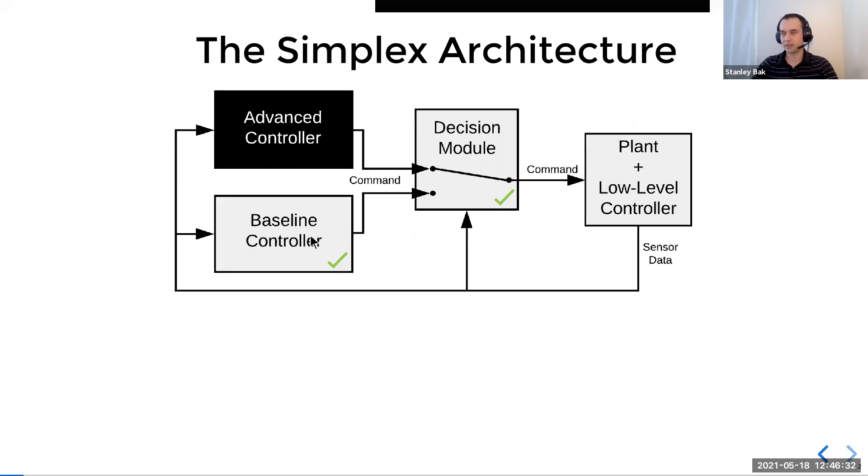But in order to add some safety to the system, you also have this backup controller, which you call a baseline controller. And the decision module monitors the state of the plant, and then it switches to the baseline controller if at some future state it's possible you get close to violating safety. And so this is the original Simplex architecture, but there are some downsides to this type of setup. The one we'll focus on today is the baseline controller itself.

There are formalisms in the paper. I won't go into too many of them in the talk, but we assume a discrete time model where, given the state, an input from one of the controllers, and potentially a disturbance, if we're considering disturbances, you have some nonlinear function that computes the next state of the system, and it proceeds in this fashion.

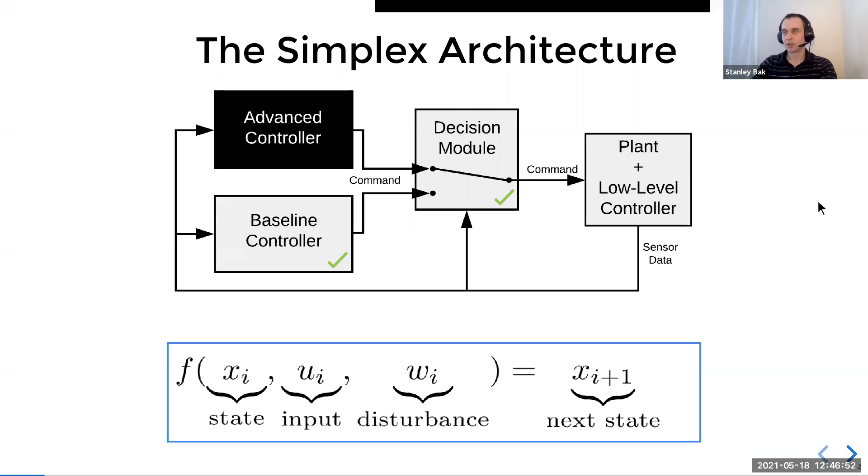So what's stopping the Simplex architecture from being more widely used? One drawback is the baseline controller must be provably safe. You need it as a backup. So if it's unsafe, your whole system will violate safety. So this means you can't typically use things like model predictive control, where you have complex cost functions or nonlinear differential equations, because this relies on solving global nonlinear optimization problems online.

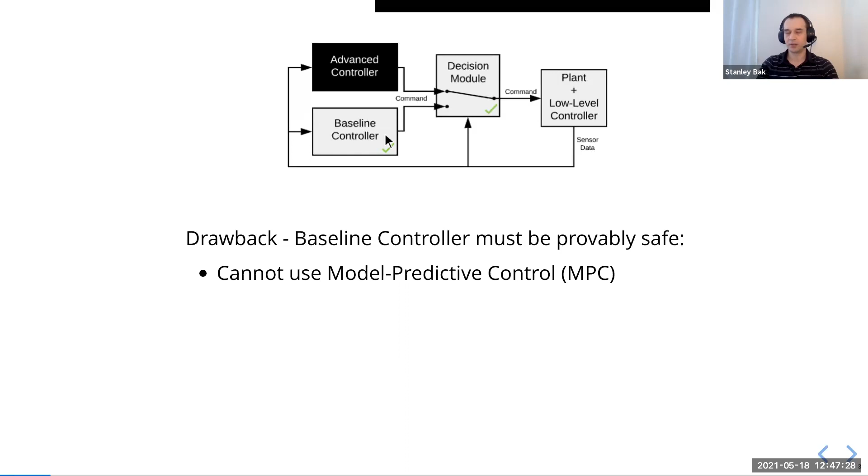And typically you have some trade-offs between exploration and exploitation, and there's some randomness involved in how those are solved. So you can't guarantee that you'll always find an optimal or even a good solution. You can't use things like rapidly exploring random trees, because again, that relies on some randomness. So you can't statically verify algorithms that use RRT, so those couldn't be used as baseline controllers.

You couldn't usually use things like neural networks. I'm interested in verification of neural networks, and certainly there's been progress in the field, but I'd say for sufficiently complex networks, you really couldn't verify that the closed loop system is safe using current technologies.

You couldn't use controllers that are safe 99% of the time. So if you come up with a really good algorithm that works well, you still wouldn't want to use that as your backup controller if there's a chance that it'll fail. At least you couldn't guarantee safety in that particular case.

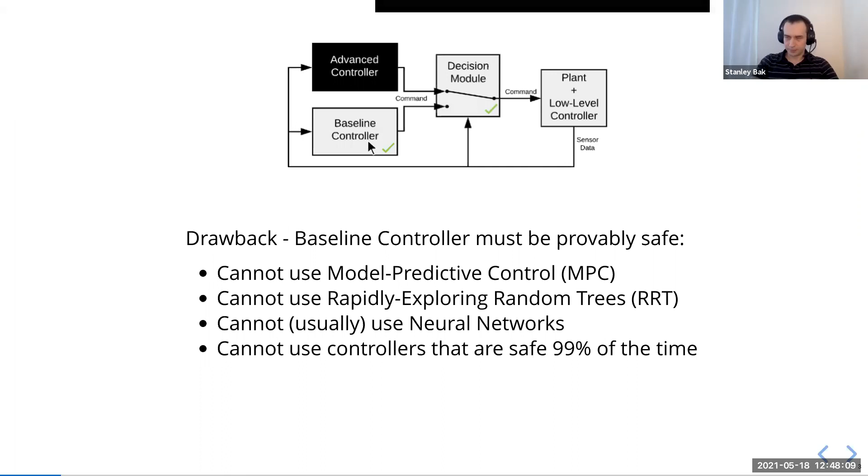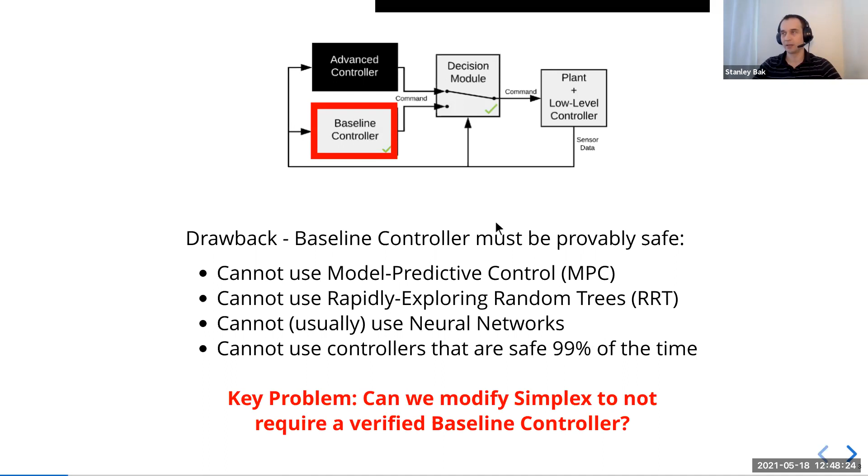So a key problem that we consider here is, could you modify the Simplex architecture to not have this requirement of a verified baseline controller? So to have a backup baseline controller, let's say it's safe 99% of the time, could I still use that in a way that guarantees safety 100% of the time? So before we get into the solution, what are some properties you would want for a system using Simplex?

The first one is you would want safety, which is that the system can't enter an unsafe state, 100% of the time. We want full correctness, assuming that the models are correct. Of course, even if you're developing a controller using control theory, you have this assumption that you have models of your system. So if the models are wrong, you can't make guarantees. So there's some assumption about models. But that's not enough.

In the original Simplex architecture, you can have safety by just always using the baseline controller. So what you really want is this other property as well, which we call transparency. This is saying that when things are going well, and it's defined in the paper more formally, but I'll explain the intuition a little later, the system looks like the advanced controller is actually the only controller in the system. So this prevents the case of just using the baseline controller forever and satisfying the properties we want.

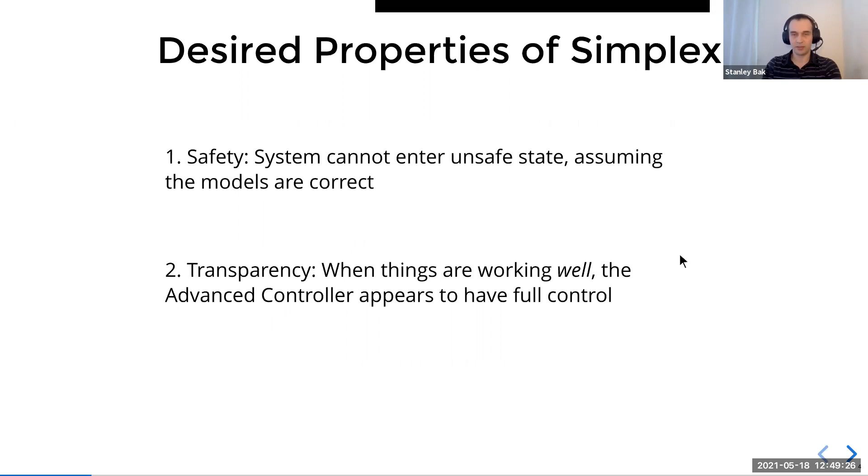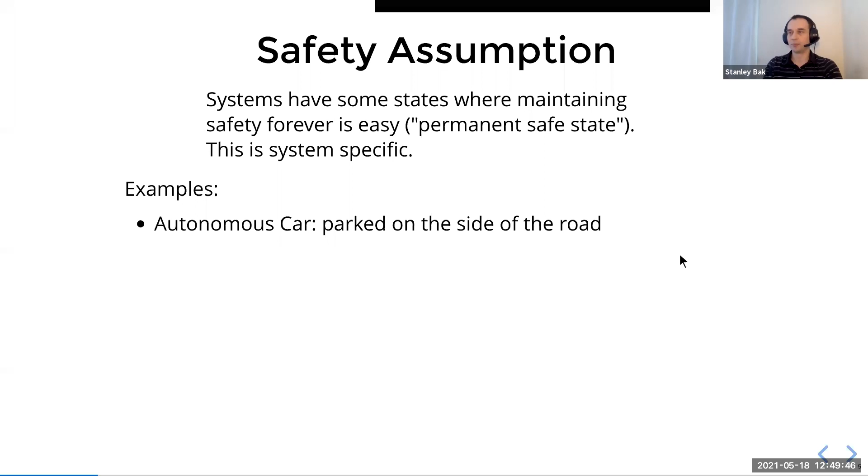So for this work, we make this additional safety assumption about systems, that there are some states where you can maintain safety forever and it's easy. We call these permanent safe states. And of course, this is very specific to a type of system, so it's easier to go through a couple examples. If you have an autonomous car, the moment that you're parked on the side of the road, that's a permanently safe state.

For a package delivery drone, maybe after it's executed its emergency landing and it's sort of on the ground resting, that's a permanently safe state. Maybe you have a fixed-wing aircraft swarm that's moving very quickly, and it's too fast for humans to be able to take corrective actions when problems occur. So then a safe state under that set of assumptions, you could just have the drones fly in non-intersecting circles, and this will slow down what's going on in the system so that a human can take control and issue corrective actions.

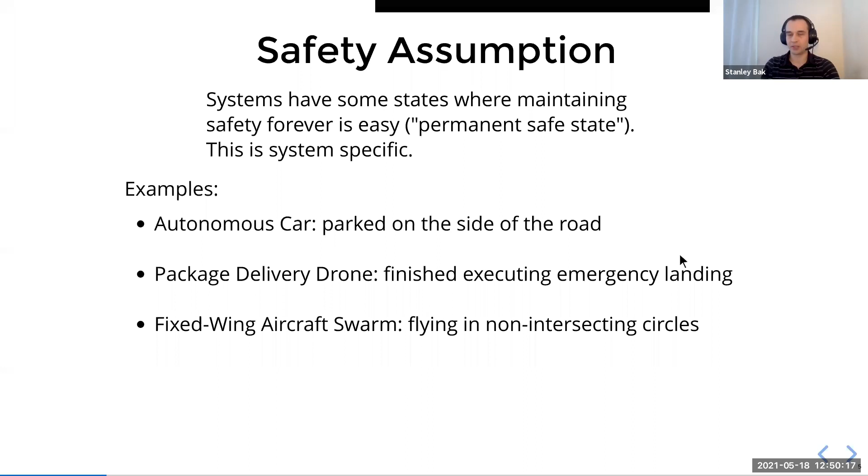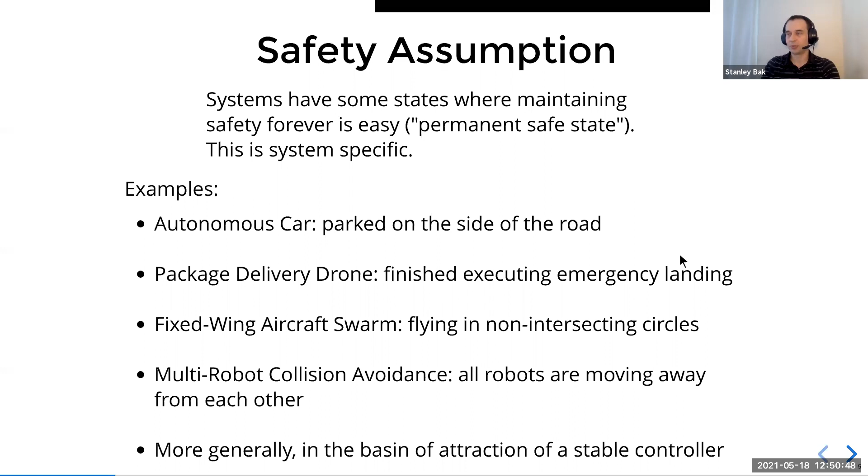If you have a multi-robot collision avoidance system, so this will be one of our case studies, we'll consider this to be safe if you have all robots that are moving away from each other, and then presumably if you keep the acceleration at 0, you won't have a collision into the infinite future. And more generally, if you're looking at control theory, if you have a nonlinear system and you're in the basin of attraction of a stable controller, and the states in the basin of attraction are safe, this could be a way to guarantee permanent safety into the future of the system.

So the intuition with black box simplex, how it works is that you have this system invariant that there's always a backup plan that can get you to one of these permanently safe states. So the way the system works is you have the advanced controller, it generates some command, which will tell you what the next state of the system would be. You'll be able to make a prediction. Then the baseline controller tries to generate a backup plan from the next state. And so this backup plan is what gets you to the permanently safe state.

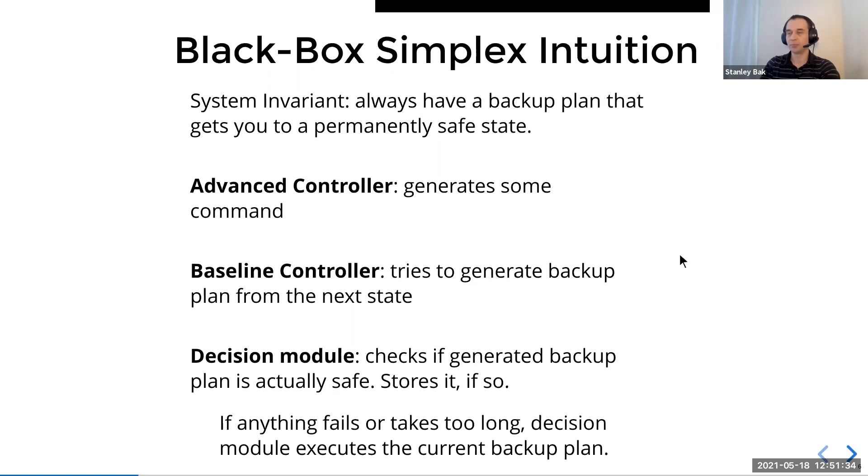And then the decision module's responsibility is to check the generated backup plan. And if it's actually safe, then you can store it for use at the next step. And if anything fails or takes too long, the decision module always has that backup plan. So that's an invariant, that you've had this backup plan you computed before. And if any of these things don't work, you just execute the current backup plan.

The picture of the system looks something like this. So here, you can start with the advanced controller. It produces a command. The look ahead baseline controller now takes that command and produces a command sequence that gets you to a permanently safe state. Then it passes that to the decision module, which actually checks that this command sequence does what it's supposed to do. And then if that's true, it'll store the command sequence for use later.

And then the command sequence importantly starts with the command that's given by the advanced controller, so that the first command that actually gets sent to the plant is the one from the advanced controller. And then the rest of the commands are the backup plan. And then at the next iteration, the advanced controller will generate another command, and then the look ahead baseline controller will again try to generate a backup plan. And this continues forever in this fashion.

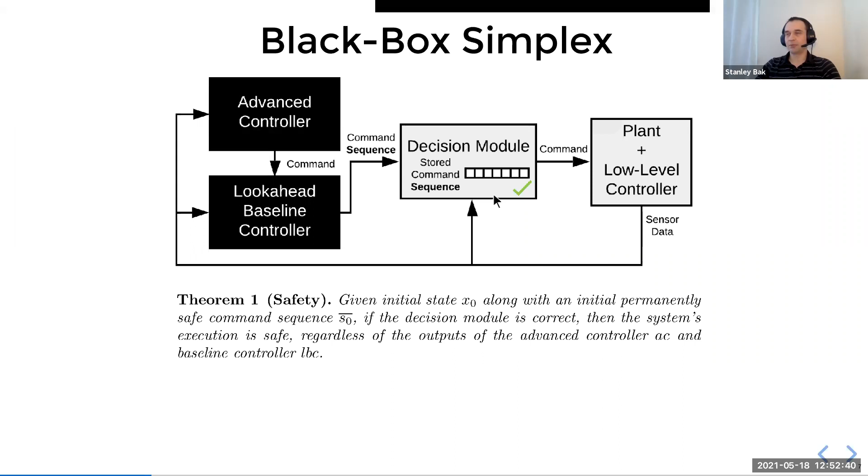So in the paper, we have two theorems about this. The first one is the safety theorem. And what this one is saying is if you start off initially safe with an initially permanently safe command sequence, this is the backup plan, then the system guarantees safety regardless of the advanced controller and the look ahead baseline controller. So these can even be incorrect. And you just look at the interface of them, you don't have to look at the internals.

The second theorem is the transparency theorem. What this one says is, from the current state, it basically states the conditions under which the advanced controller gets to actually actuate the plant. So if the advanced controller produces a command that actually has a backup plan, the look ahead baseline controller is strong enough to be able to generate that backup plan, and the decision module is strong enough to be able to check that backup plan and guarantee that it's safe and everything works fast enough, then the command that gets sent to the plant under those assumptions will always be the one from the advanced controller. So the whole system works transparently from that perspective.

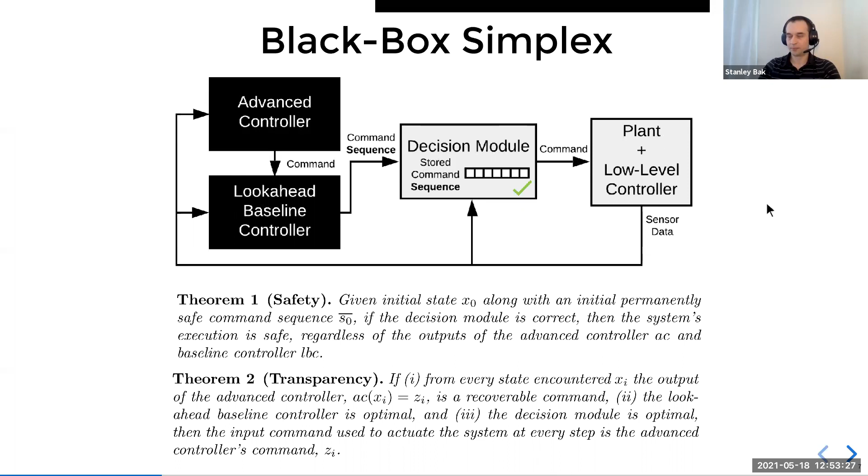And so does this actually work? So there's two case studies that we go through.

The first one we call multi-robot collision avoidance. The setup is sort of here. You have a bunch of robots that start out initially on a circle, and every robot has a goal state that's across the circle. So this robot here in red has this goal state, which is this blue cross here. So it tries to go across the middle of the circle. So if you just go straight, everyone will collide in the center.

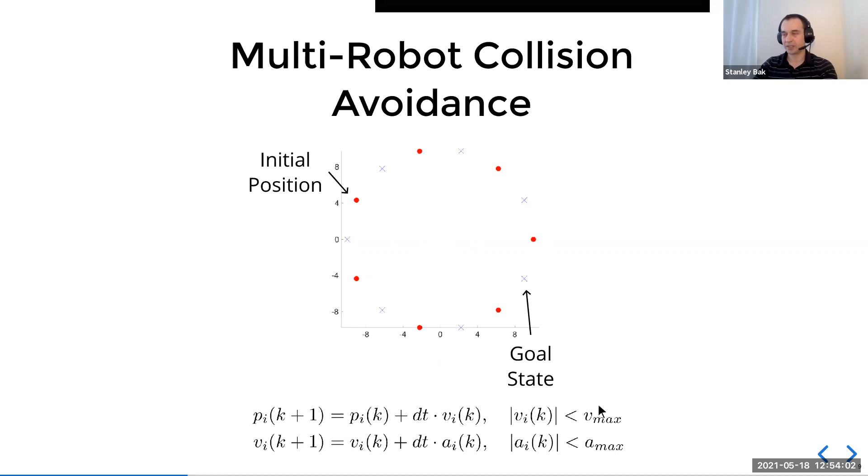And this one has very simple dynamics. There's positions and velocities, and the control commands are the accelerations. And the magnitudes of the velocities and accelerations are bounded with some maximum value. And the strategy we take to solve this is a model predictive control formulation. So for both the advanced controller and the baseline controller, we use model predictive control, but we have separate cost functions for the two controllers.

So the advanced controller, what it tries to do is maintain separation. This is sort of like a potential fields approach. So it combines two terms. You have the separation term: you want to stay away from everybody else, and you also want to get close to your target. So it's a get to target term. So it's the sum of these two terms.

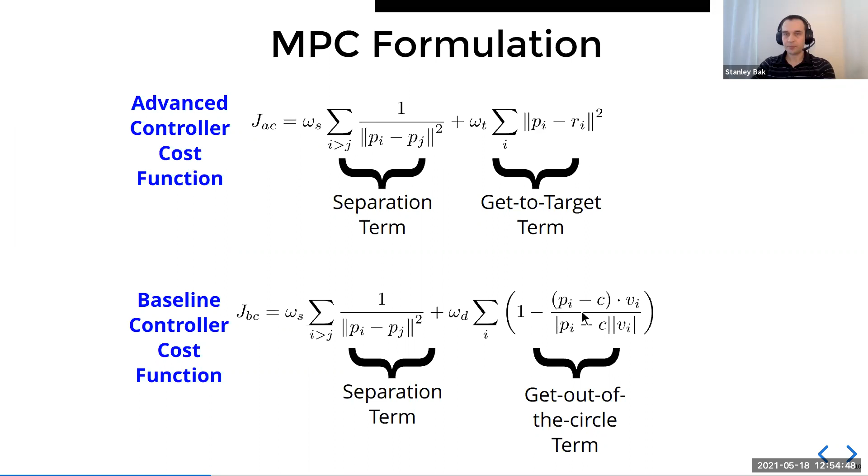The baseline controller also tries to maintain separation, but instead of trying to get to the target, its goal is just to get out of the circle. So it has a simpler goal that hopefully is easier to solve than the one the advanced controller is trying to solve. And then for optimization purposes, you combine this cost function term from the previous slide with a penalty on the control, how much control you actually send out. So you don't want to send very high accelerations to the system.

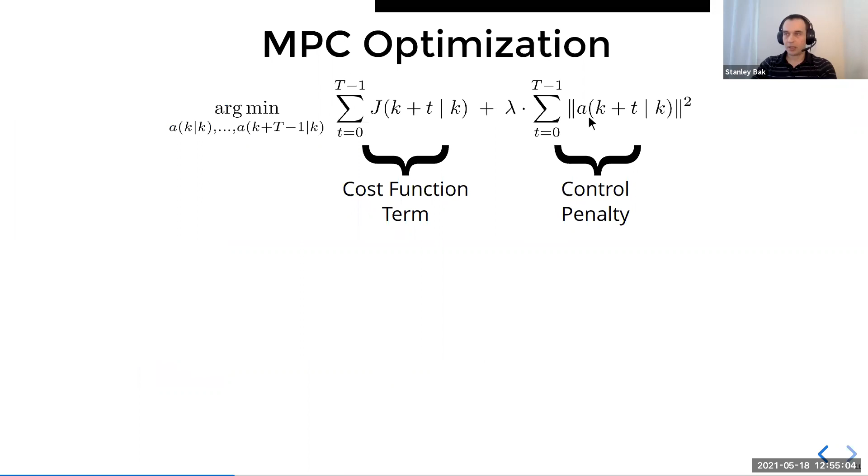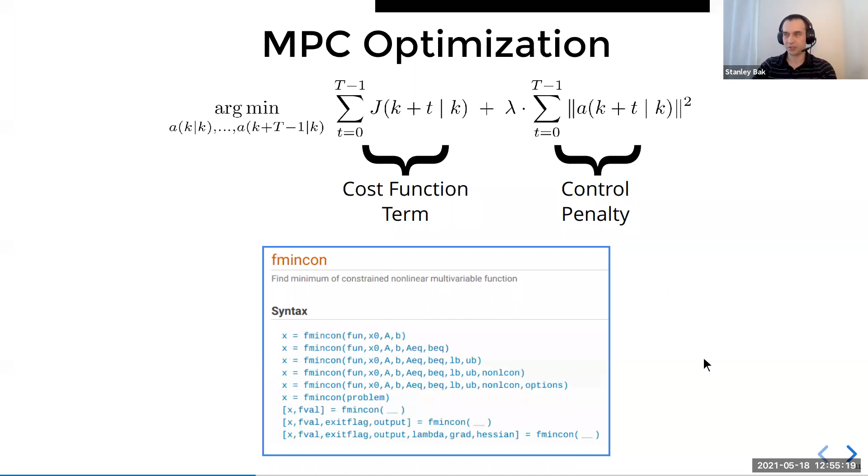And then to actually run this, we use something like fmincon from MATLAB. So there aren't really guarantees that we're going to minimize this cost function. We aren't really going to find all of the accelerations, but it might work well in practice. And we can actually make it fail by limiting the number of iterations that it runs. So in the original Simplex architecture, you wouldn't want to use this, right? Because the baseline controller can fail in this case.

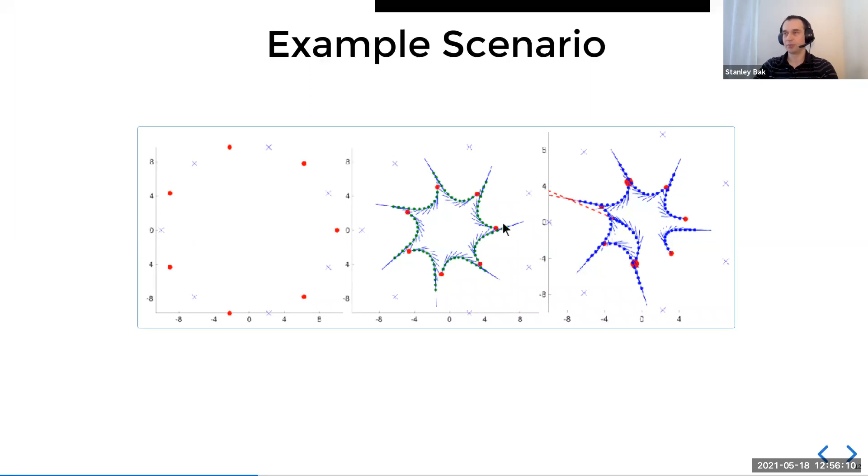At the next step after this one, you get this backup plan, which is not safe because here the last position and velocity vector going from that intersects with another robot. So these two robots actually look like they might intersect in the future. So this backup plan is not a safe backup plan. This one gets rejected, and so we'll switch to this backup plan. And so we'll see that in this animation. I'll just let it run through once, and then I'll look a little bit closer at some of the frames.

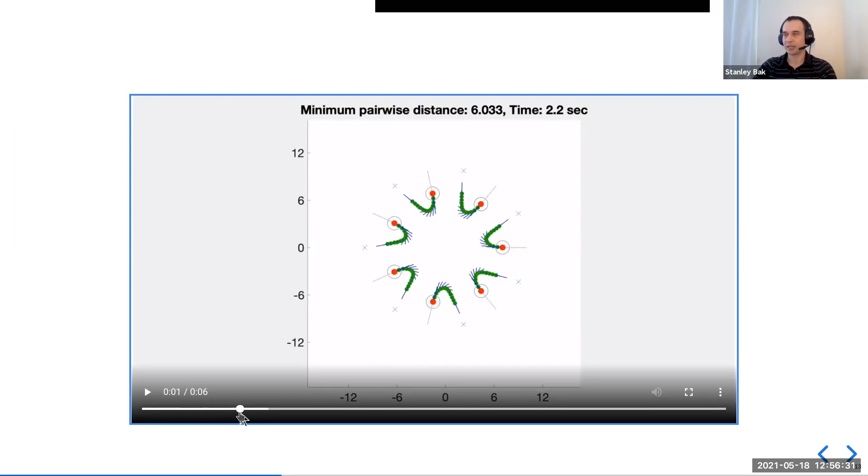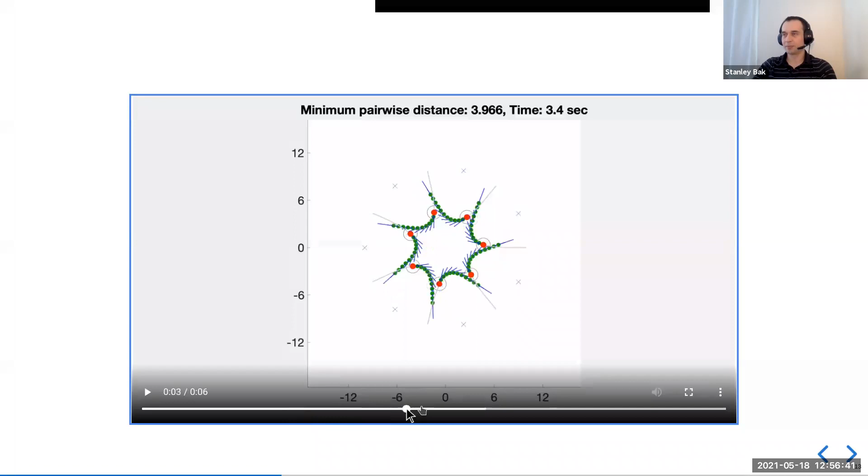So at the very beginning, the robots start at the middle, and you can see that they start moving following the advanced controller commands, and you can see the backup plans being generated. So the backup plans just try to guide the robots outside the circle. And it works well up to here, and then you get this backup plan, which is the not safe one. So then what the robots do is they switch to the previous backup plan and then just execute that, and nobody has a collision. And you didn't really accomplish the goal, but nobody collided, which is fine. It's safe at least.

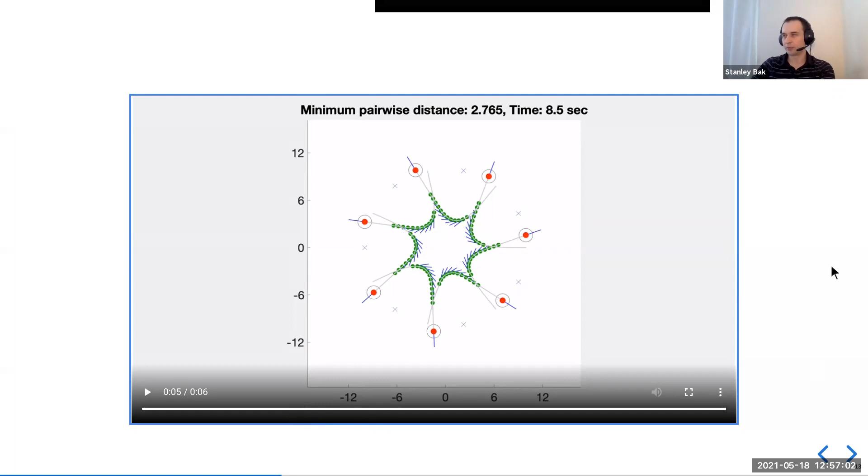So this could be modified as well. So here, as soon as we switched to the backup plan, we stayed with the baseline controller's plan. We didn't switch back. You can actually switch back. It's valid to do that. And so that's what we call reverse switching, and that's the next scenario.

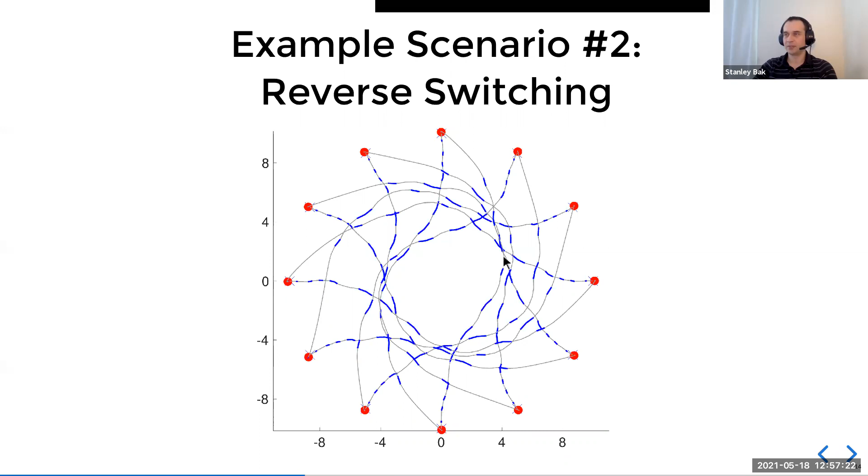So in example scenario 2, it's the same sort of setup with more ground robots. What's shown here is the path of the robots taken when reverse switching is active. So the blue states are parts of the path where it's using the baseline controller, and then it switches back, and so you get more black states. And if you follow each of these, you can see they actually made it to the other side of the circle without intersecting. So here's the animation of that.

In this case, when the robots are red, they're following the advanced controller's command. And when they're blue, they're following the backup plan. So you can see them actually turn a little bit towards the outside of the circle when it's blue. And then when it's red, they go back to following the advanced controller's command.

And in this case, because we have this reverse switching now, even though they occasionally use the backup plan, they're all able to accomplish their goal eventually and get to the target state.

We can incorporate uncertainty into the system if we wanted to. So the way we do that, there's two ways. You could consider sensor error in your initial position, or you could consider disturbances at each point in time too. So we considered both of those. Since this is a linear system, we could use reachability using zonotopes.

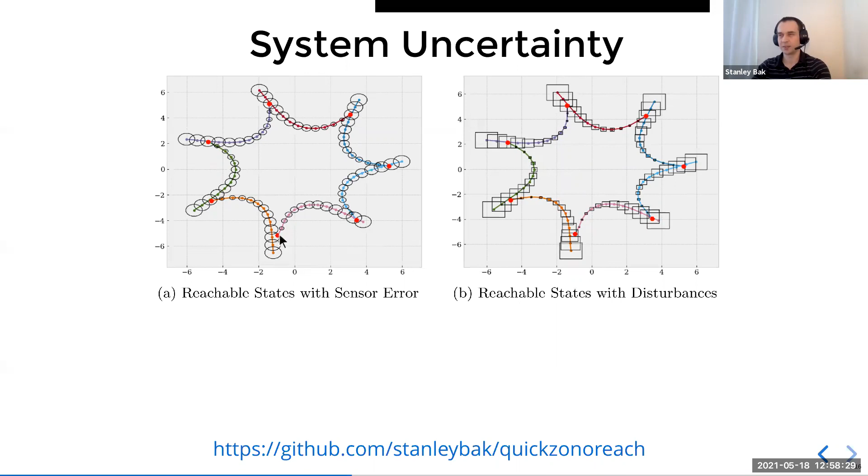And so there's this quick zonoreach library that you can use, which is sort of an efficient implementation for zonotope-based reachability. In this case, there's time varying inputs because you have a disturbance at each step. And in this step, the uncertainty is all in the initial states. And so what ends up happening is at sort of the final state here, you get a zonotope with 112 generators. With disturbances at each step, you add more generators to the zonotope. So at the last step, you have 364 generators.

But this is still fairly quick. So computers are fast, and this reachability with zonotopes is pretty good. So this is still sort of milliseconds to do these types of reachability computations. So it seems usable.

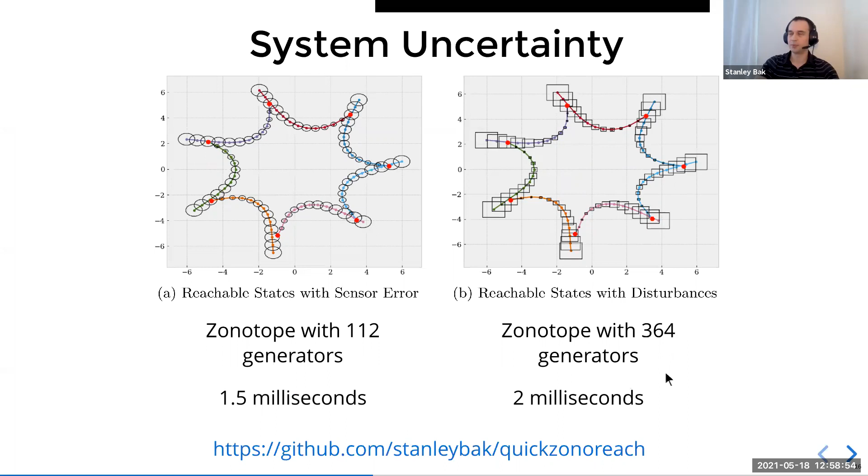The second case study is collision avoidance in multiple F-16s. So the theme of this case study is to make a really hard scenario. And so we'll take several steps to make something that I think would be very hard to try to formally or statically verify for correctness. So the first way we make it hard is we consider a neural network controller. So this is the ACAS Xu collision avoidance system. This is actually a pretty popular benchmark in the neural network verification community.

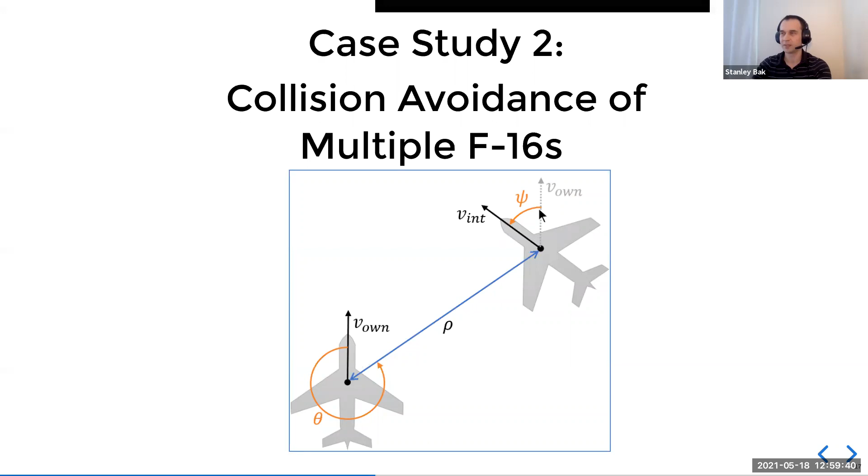The neural network tries to avoid collisions of aircraft by issuing commands. So this is actually the geometry of a scenario. So you have an ownship and an intruder aircraft, and based on their relative distances and relative headings, you feed those as inputs to the neural network. And the neural network outputs whether you're clear of conflict, or whether you should issue a turn command: weak left, weak right, strong left, strong right.

So this is used as a benchmark for neural network verification. Typically, the properties are open loop properties, which means that given some constraints on the inputs, what can you prove about the outputs? So you could have properties like, if there's an aircraft directly in front of you, make sure a turn command is issued. That's sort of one example from this paper by Katz.

This is sort of hard enough as it is, although sometimes you might be able to verify aspects of this. So let's not just look at a neural network. Let's look at something harder, which is a closed loop system that uses a neural network. So here you could have a physical system that looks something like this, where you have the ownship on the bottom and the intruder is coming on top.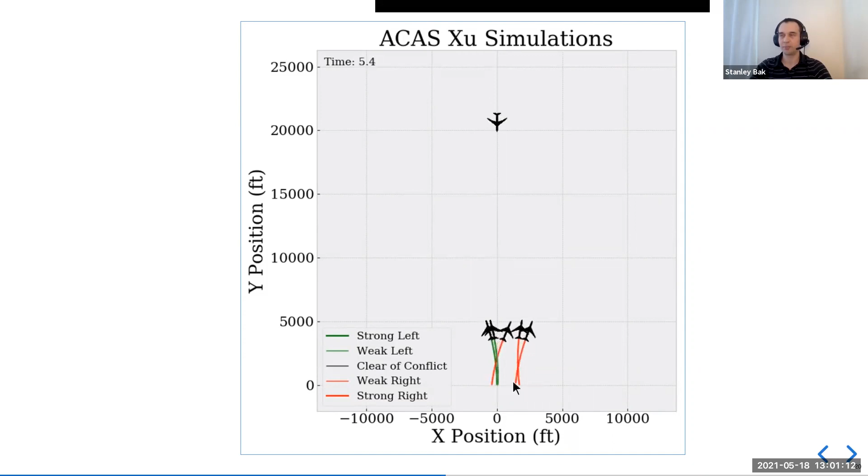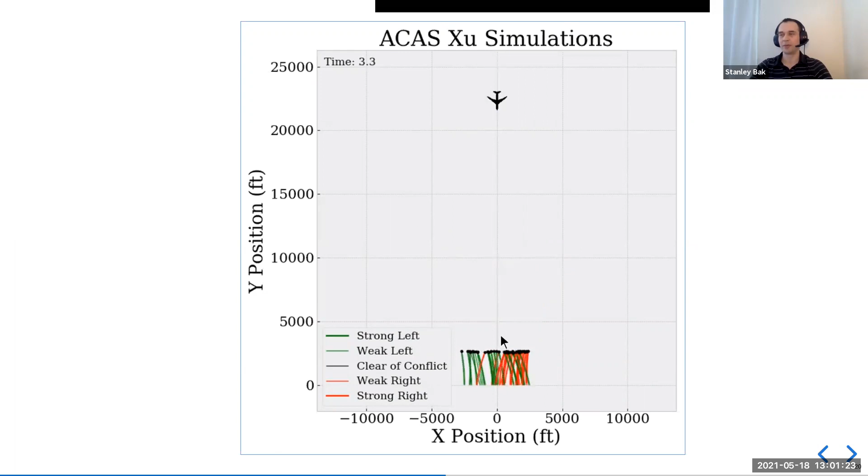And now you can see that you have multiple invocations of the neural network over time that tell you which way the ownship should turn. And depending on the initial position of the ownship, you get different command sequences issued. So here was just 5 different initial positions of the ownship for the same intruder. And this is sort of much harder to verify because you execute the neural network multiple times.

The physical dynamics here are still Dubins car dynamics, so it's sort of fairly simple. There were semantics as to what strong left and weak left mean. So weak left, I think, is 1.5 degrees per second, and strong left is 3 degrees per second. So you can execute exactly that response using a Dubins car model.

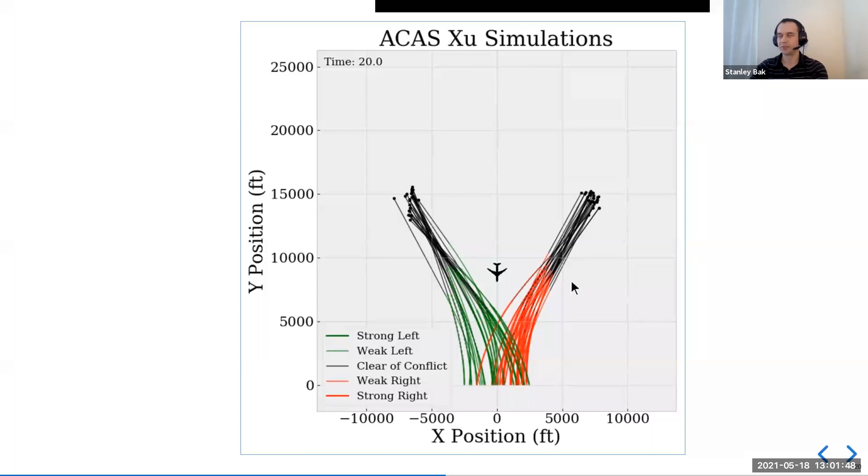But still, this is sort of harder to guarantee safety, and I don't know of any work that really proved safety for this closed loop system, even with the sort of simple Dubins car dynamics. But we want to make a hard benchmark, so let's make the system even harder. So how can we do that?

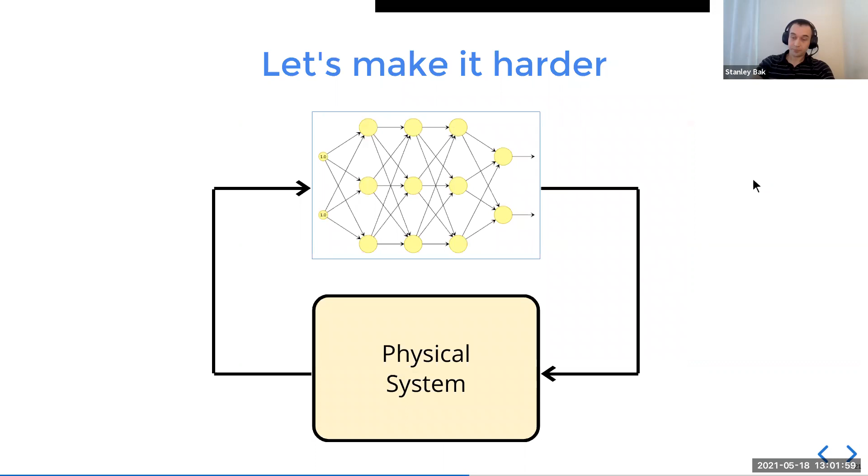So instead of using Dubins car dynamics, let's instead use a more complicated aircraft model. So in particular, let's use an F-16 simulation model. And so this is a benchmark we published in ARCH, which is just taken from an aerospace engineering textbook. And so it's a nonlinear system. It's 6 degrees of freedom.

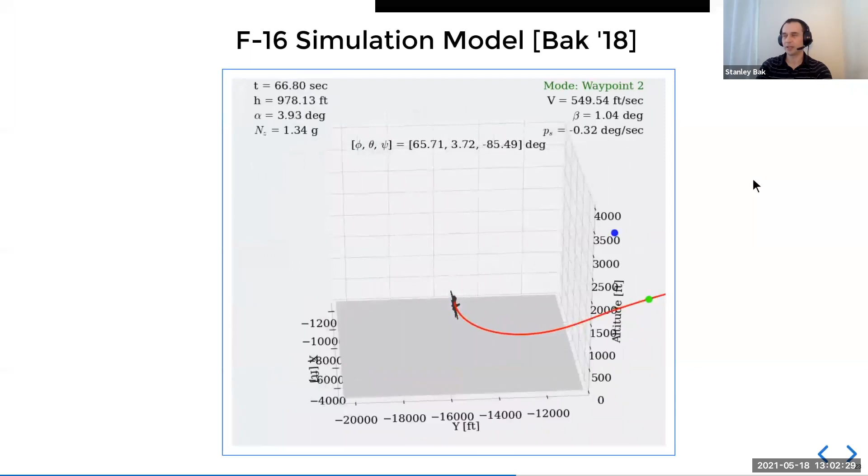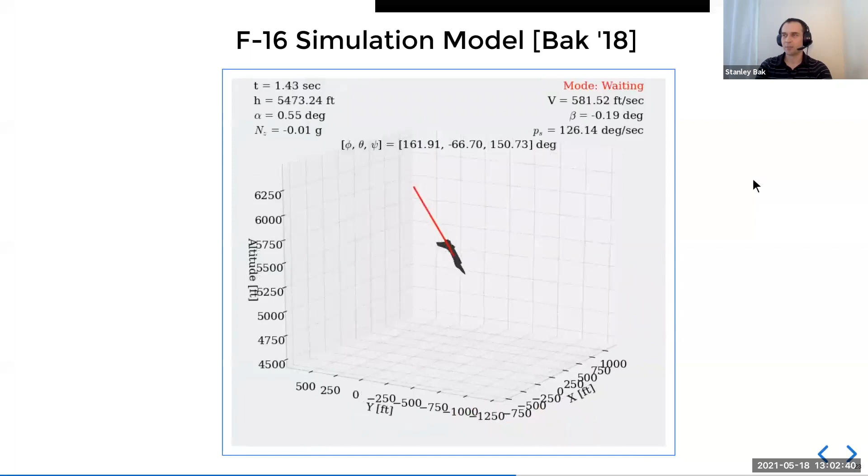There's 12 state variables for the aircraft, 1 engine lag term, so 13 state variables there. And then I think there's 3 integrators for the low-level controllers. And it's able to do things like fly between waypoints and execute certain maneuvers. But it's a complex nonlinear system. You don't have closed form differential equations. This is done using Python code. I think there's a MATLAB version as well. But it would be very hard to verify anything dealing with this type of physical system.

So we can combine this F-16 model now with this ACAS Xu system and get responses that look very similar to the Dubins car model, which is sort of what you would expect. Although you should keep in mind that here, it looks like it's the same type of response, but behind the scenes, this is the 16-dimensional nonlinear model where you can't turn instantaneously. The aircraft first has to roll before the heading starts to change. So you have a 16-dimensional nonlinear system for each aircraft here, both the ownship and intruder.

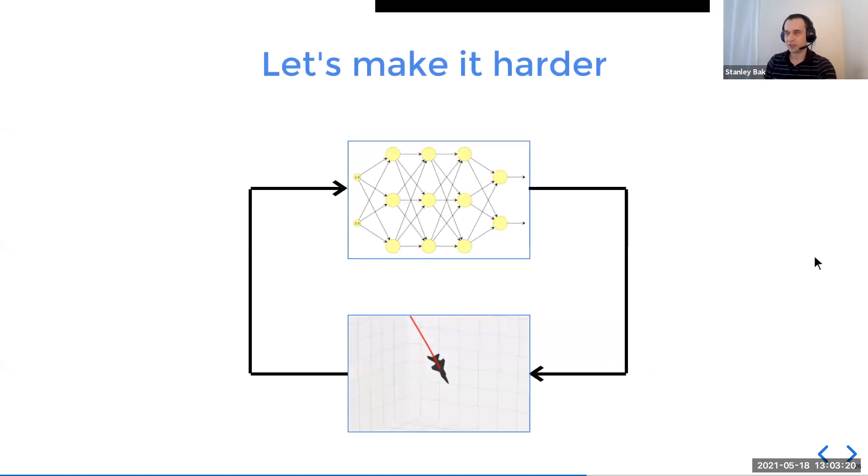Okay, so let's say we have this system now. Let's make it even harder. So this is the last thing that we'll do, which is rather than just having a single aircraft, let's now replicate this. So we have multiple aircraft in our scenario, and we're trying to avoid collisions. So this is a mutual ACAS Xu system, where just like the collision avoidance system with robots, everyone starts in a circle going towards the center. The goal is to fly to a waypoint on the other side of a circle. So if you were to do nothing, all the aircraft would collide in the middle, so it wouldn't be safe.

And the baseline controller will be to use ACAS Xu, but of course, ACAS Xu is only defined on sort of a single intruder aircraft. So what we do is we run ACAS Xu against every other aircraft in the scenario. And if there's a turn command issued, we find the closest aircraft that has a turn command that gets issued and use that command. So if everybody's clear of conflict, you can use the advanced controller. If any ACAS Xu issues a turn command, that aircraft will turn. And of course, everybody's doing this against everybody else.

So this almost feels like the original Simplex architecture, right? We have this ACAS Xu, which can tell you clear of conflict, and then you could use the advanced controller. Otherwise, you could just use the baseline control, which is follow ACAS Xu. And so the question would be, can't you just use ACAS Xu? Like, doesn't this solve the problem, right? It almost looks like it would work. And of course, the answer is no, right?

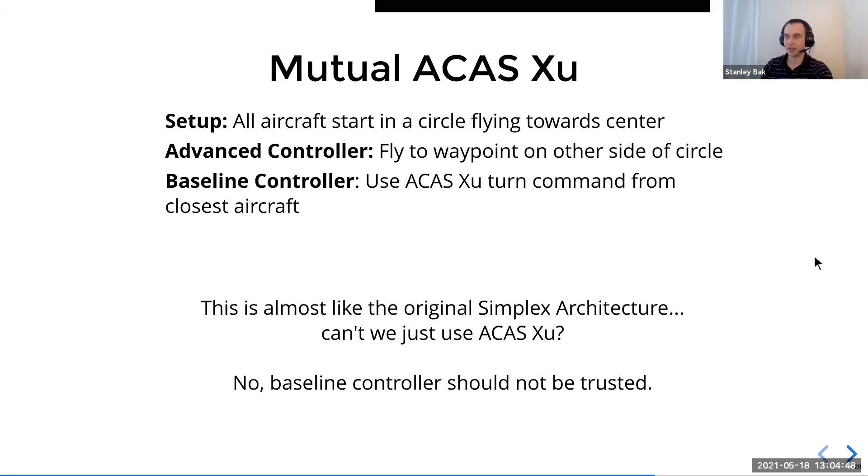So the key thing we wanted to do with black box simplex is remove this assumption that the baseline controller should be statically verified. So here, the baseline controller is not statically verified, and it shouldn't be trusted. And so there's a number of reasons why that is. The first one, the POMDP formulation, my understanding is that was never formally verified to avoid collisions. There's this neural network compression that goes in with ACAS Xu, so it doesn't exactly replicate the POMDP commands. So that's never been formally verified.

Also, we're using these closed loop F-16 dynamics, not a perfect Dubins car model. So that's going to lead to potential problems. You can't turn instantaneously in that type of system. And ACAS Xu was designed for single aircraft collision avoidance. So we have this multi-aircraft scenario, which sounds kind of reasonable, but this is not the way the system was designed. So this is sort of like out of distribution usage. And that one leads to a lot more problems. And so we'll see some examples of this a little bit later. But the issue is, I think it'll be very hard to try to formally verify any type of baseline controller for this scenario.

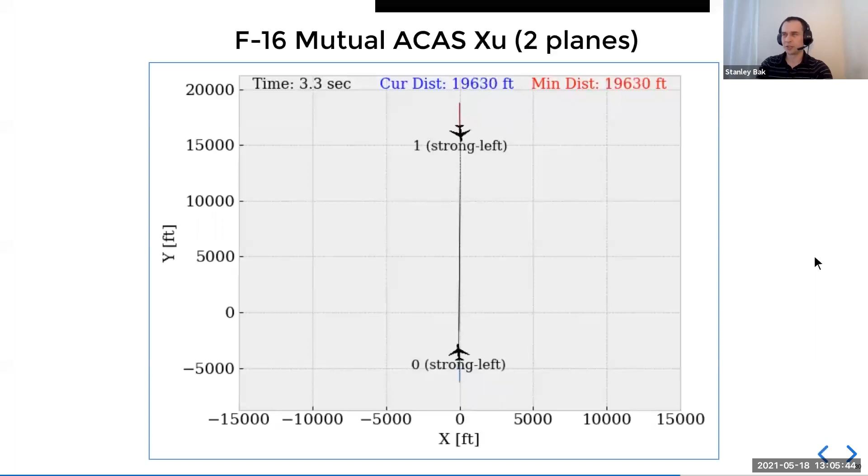So this is just showing how this mutual ACAS Xu is working. So in the two-plane scenario now, each aircraft turns against the other one. And you can see that looks like collisions are avoided. So that's pretty good. You can have more complex scenarios, and it sometimes works reasonably, right? So what's shown here is the command each aircraft is issuing, and the line is the other aircraft it is trying to avoid, right? So each aircraft can only avoid one other aircraft at a time with ACAS Xu, and you can see which one is being followed.

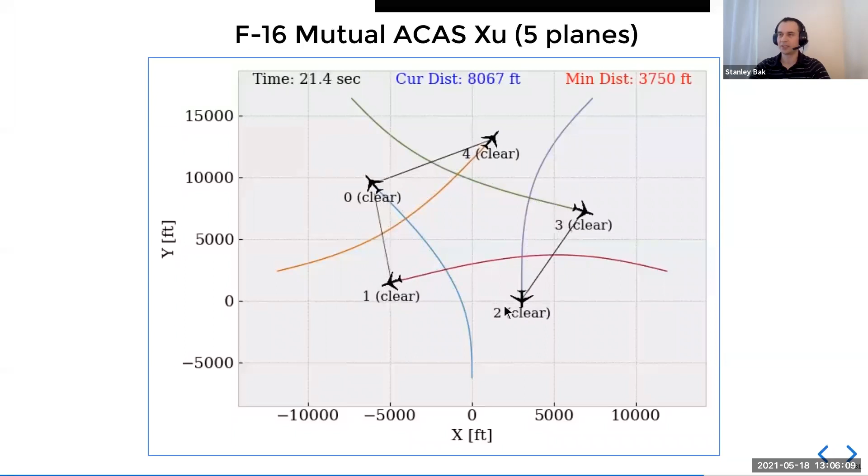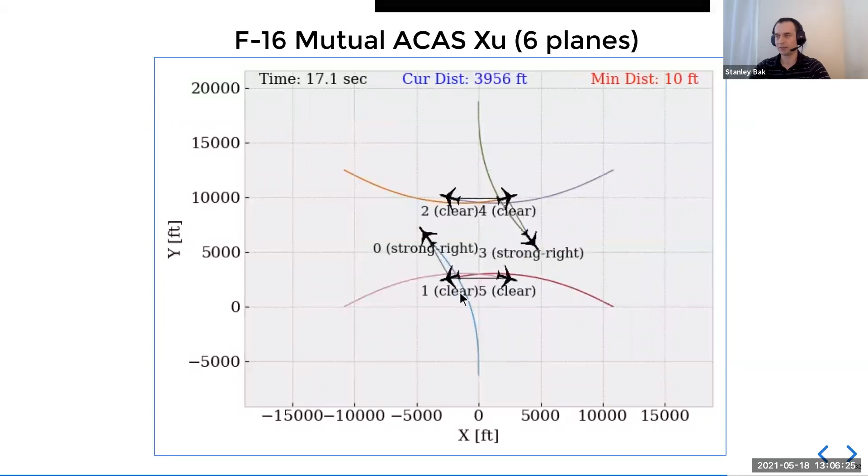So here in this 5-aircraft scenario, it was actually able to safely navigate it. But it's not too difficult to find harder scenarios. So here's a 6-aircraft scenario where you start to see some of these problems. If you look at these 2 aircraft on the bottom, they actually end up colliding following this type of setup, as well as a couple other aircraft. So this baseline controller is not really safe.

But if we adapt this and use this black box simplex setup where we take the first command from the advanced controller and then follow what ACAS Xu would do and check if it can still guarantee safety, and do this at every control iteration here, we can actually design a system that's safe and provably safe. And so this is now comparing using the original ACAS Xu system versus black box simplex.

So in the original ACAS Xu system, even this simple 3-aircraft scenario, you can see here, it's showing the frame where the aircraft are closest. So the solid line is the historic path and the dotted line is the future path. And so here there was an aircraft on the bottom, and these 2 aircraft on the top both decided to turn to avoid the bottom aircraft, and in turn they ended up crashing into each other because of that.

Whereas with black box simplex, all aircraft, so this is the closest frame, you can see the closest distance is 1,600 feet. And so here I think for the requirement it was 1,500 feet. So they sort of safely navigated this scenario.

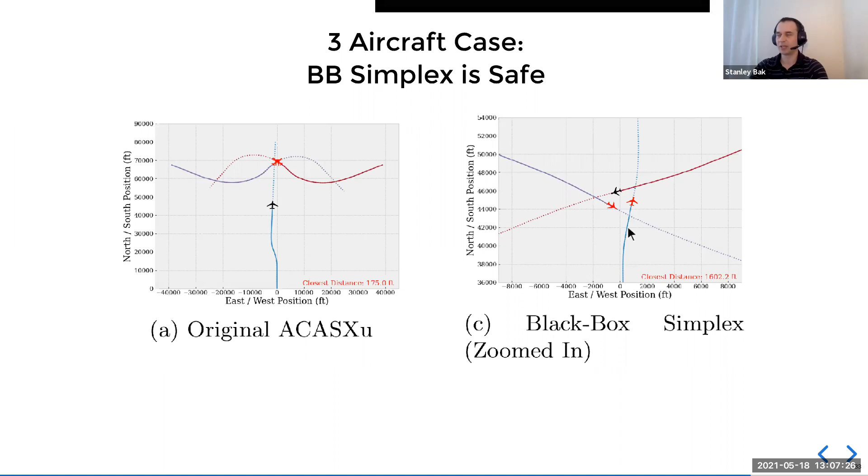In the 4-aircraft case, the sort of conclusion we want is that black box simplex is more transparent. So using ACAS Xu, the system safely navigates the scenario. 4 aircraft are able to all get past each other. But the closest distance is 5,000 feet. Whereas here with black box simplex, if we had a requirement as 1,500 feet, the closest distance is a little under 1,600 feet. So it not only navigates the scenario, it doesn't have to deviate the path as much as ACAS Xu originally does.

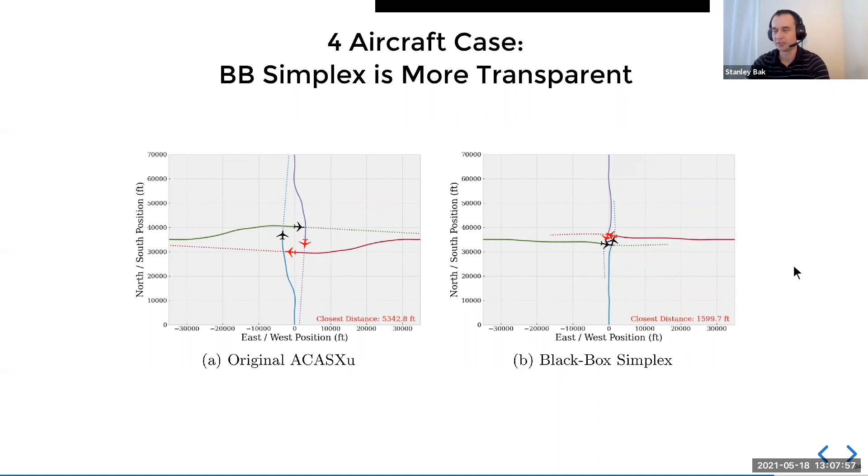In the 7-aircraft case, we're showing that black box simplex is easily customizable. So originally, if you use ACAS Xu, this is a failure. It doesn't navigate the scenario, aircraft crash into each other. With black box simplex, we can very easily change the safety distance by just changing the check distance in the decision module for collisions.

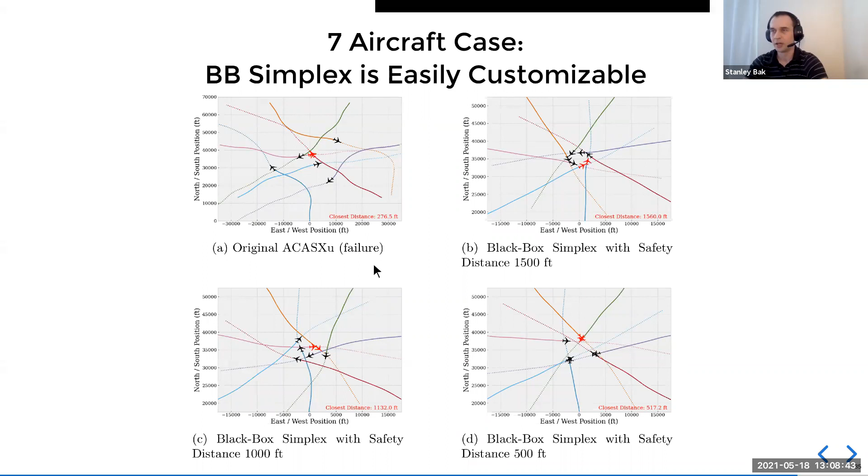So if we use a 1,500 feet collision distance, the closest distance is a little over 1,500. If we lower that to 1,000, it's about 1,100 feet. If we lower it to 500, it's about 517 feet. So all of them avoid collisions, and you can change the desired safety distance. So this would be really hard to do with ACAS Xu originally, right? You'd have to recompute the POMDPs and redo the compression and then redo any verification of the compression that you've done before, but we can do it just by changing a parameter.

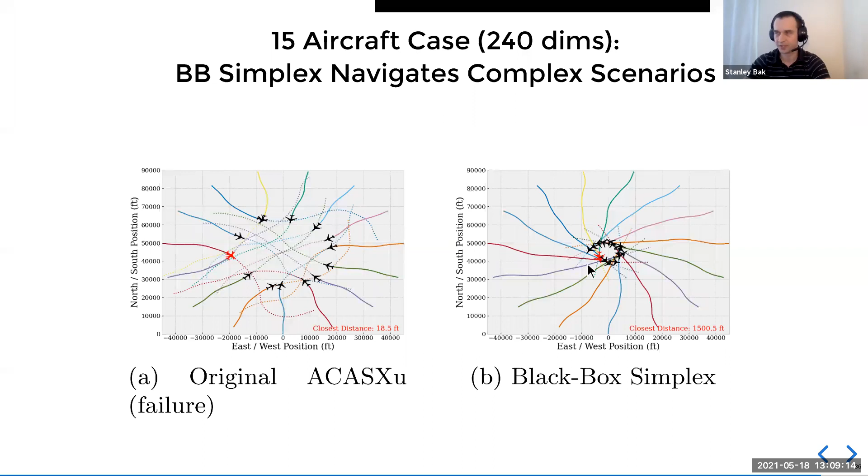And finally, the 15-aircraft case, this is showing that we're able to safely navigate complex scenarios. So keep in mind, each aircraft is a 16-dimensional nonlinear system. So this is a 240-dimensional nonlinear system. ACAS Xu originally fails in this scenario. There's multiple aircraft that overlap. With black box simplex, you get this maneuver that looks a little bit like a roundabout maneuver. And so this is an emergent property. This is not something hard-coded into the system, but it's how the system was able to actually solve this scenario.

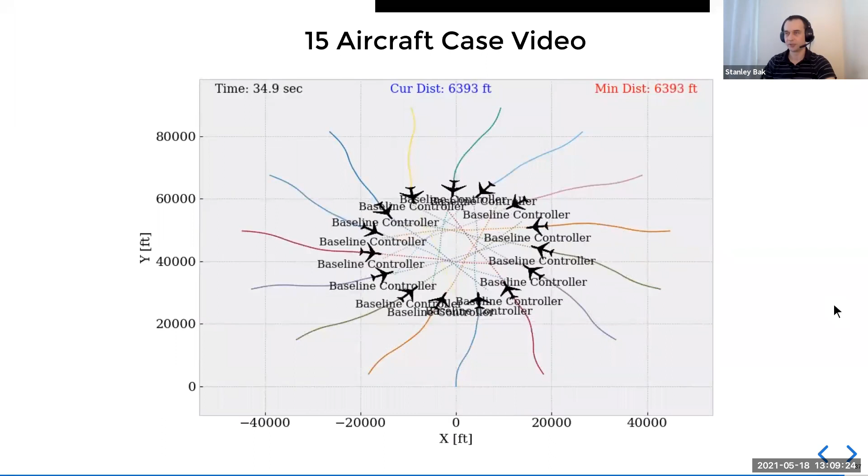So here's an animation of that case. And you can see the aircraft switching between the baseline and advanced controller. So you can see this reverse switching is important. And every aircraft flies by every aircraft without violating the collision distance. So the minimum distance here eventually gets to 1,500 feet. So we'll just watch that one more time.

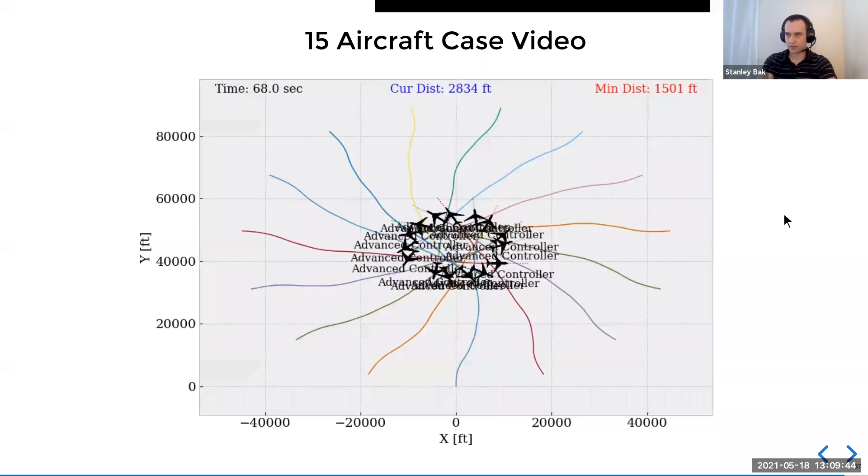And so the conclusion: black box simplex allows you to build systems using unsafe baseline controllers. And the way it does that is you have more extensive runtime checks, and you have these stored command sequences in the decision module. So the decision module is not producing any command sequences. All it's doing is executing these stored command sequences and maybe updating them based on the information provided to it by the lookahead baseline controller.

And so this is really neat, because now if your baseline controller is correct 99% of the time, or you don't have a formal proof of correctness, even though it looks like it's working well, you can now use it in practice and still get guarantees for safety. So there's a longer report you can find on arXiv if you search for safe CPS from unsafe controllers that describes some of these details.